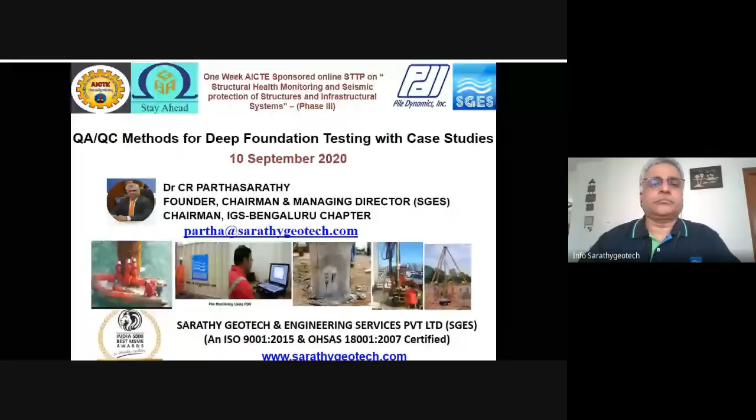We started in 2007 to provide services on an integrated approach for both offshore and onland projects. This is our vision and mission. We have accumulated a large repository of database across multiple geographies. It's not just the geotechnical data, but also the foundation performance, because we get involved in testing as well. This gives us a lot of confidence in deriving the ground model and appropriately designing the foundations.

We are present in India and in a few other countries as well, as you can see here: Indonesia, Saudi, UAE, and Vietnam. Our primary focus was oil and gas, but of late, for the last few years, we also have significant projects coming from real estate infrastructure, railway infrastructure, mining, renewable energy, and some small aspects from the dam sector.

More than 50% of our service is consumed outside the country, and thus the state government and the central government have conferred the export award consistently for the last few years. I'm sure even this year we will be honored with this prestigious award.

As far as the scope of service is concerned: offshore geotechnical and geophysical investigation, pile drivability analysis using wave equation program, fatigue during driving analysis, pile monitoring using pile driving analyzers. I'll be talking about this high strain dynamic test in this presentation. I will also give an introduction to CAPWAP analysis, leg penetration analysis, and punch-through assessment of jack-up rigs.

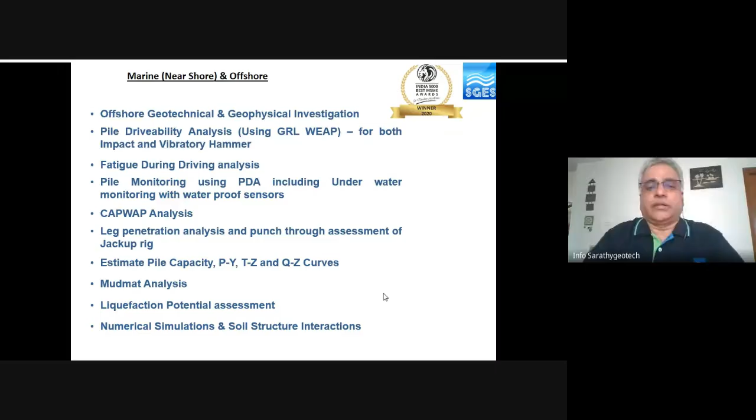This is for an exploration project in the oil and gas sector: the load transfer curves and the capacity estimation. MUDMAT is a shallow foundation problem, liquefaction potential assessment, and this will go into the engineering report as part of the offshore geotechnical investigation. We have a large suite of internationally acclaimed, recognized software, and the recent addition is Plaxis 3D to model three-dimensional soil structure interaction problems.

Onshore and offshore, we always advocate an integrated approach: site survey, performing a geophysical investigation, identifying the geohazards, and developing the scope of geotechnical investigations. We use all the data together to design the foundations, whether it is offshore construction or onshore construction.

Even onshore, we do geophysical investigations using MASW, seismic refraction, cross-hole and downhole tests, electrical resistivity, and GPR. We added all these in the last few months, along with geological investigations, when you have rocks, to evaluate the rock mass and geological mapping, plus geotechnical investigations with SPT analyzers.

I'm not going to talk about this in this presentation, but it's very important to measure the energy transfer to the rods while conducting the SPT, to also apply field corrections, normalizing to 60%, where we actually use a lot of correlations for design of shallow and deep foundations, bearing capacity, settlements, slope stability, and retaining structures.

Bored pile testing, PDA and PIT, I'll be talking extensively on this. Cross-hole sonic logging, shape and squid, I will talk about this in this presentation.

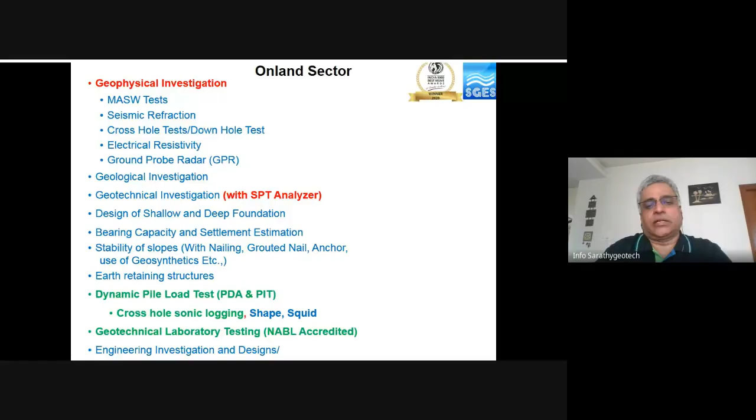Geotechnical laboratory - all the green color ones are accredited to ISO 17025 standards, that is, in the country, NABL accreditation. Engineering investigations and designs, pavement geotechnics, and forensic geotechnics if there is any failure case studies. Ground engineering and installation solutions.

We have been very successful in design and building deep excavation, vertical cuts as deep as about 18 meters as of now in Bangalore.

We have added this asset, the jack-up barge, to conduct marine geotechnical investigations. We have the capability up to about 12 meters water depth currently.

We are also adding this multi-purpose high-end geotechnical drilling rig, which can conduct an SPT test with an automatic hammer using this capstan, can perform a CPT test, wireline rotary drilling. You can do an in-situ vane test, collect samples in soft clays. If you have rocks, you can switch over to core barrels and collect rock core samples. This high-end drilling rig is being introduced from the US for the first time in India.

This particular product will be available by the end of October. One of the advantages we will derive is to cater for infrastructure projects of the time. For 50-meter boreholes, with our existing methods, whether it's a hydraulic rig or a calyx rig, it will take a few days to complete one borehole, but this rig can do 2 boreholes in 1 day. So that is the advantage. We want to utilize this for fast-track infrastructure projects. If there is any need, please get back to us, so we can block this resource for important projects.

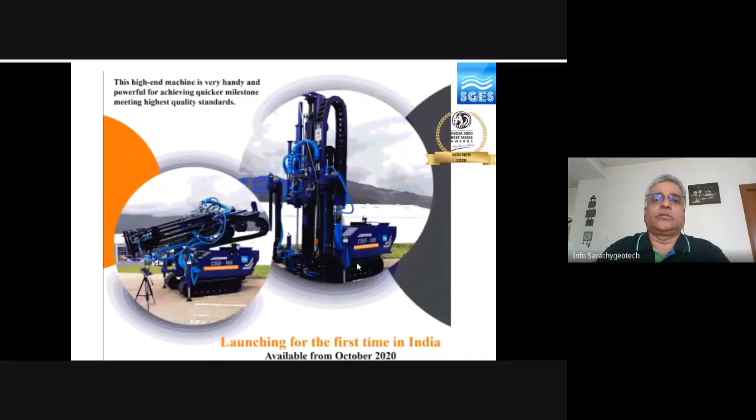Now, on deep foundation testing: static load test, axial compression, pull-out, lateral, conventional testing, low strain integrity test, cross-hole sonic logging, shape, squid, high strain dynamic test will be the topic of today's presentation. I will start this on the next slide. So after this brief introduction about our services, I will get into the topic of today's presentation.

First I will start with the QA/QC methods before the construction of the pile, that is before pouring the concrete, using the shaft quantitative identification device, which is the SQUID, and shaft area profile evaluator, which is the SHAPE. Then I will get into the low strain integrity test, discuss the other methods of integrity evaluation using cross-hole sonic logging test, and lastly give an introduction to the high strain dynamic load test, which will be a replacement to the conventional static load test by Kentledge methods.

So SQUID is a shaft quantitative identification device. I acknowledge Dr. Rozbeh Moghaddam, some of this information I have collected from him. He's also an expert in evaluating this, both the software and the hardware and the philosophies that have been developed into this technology.

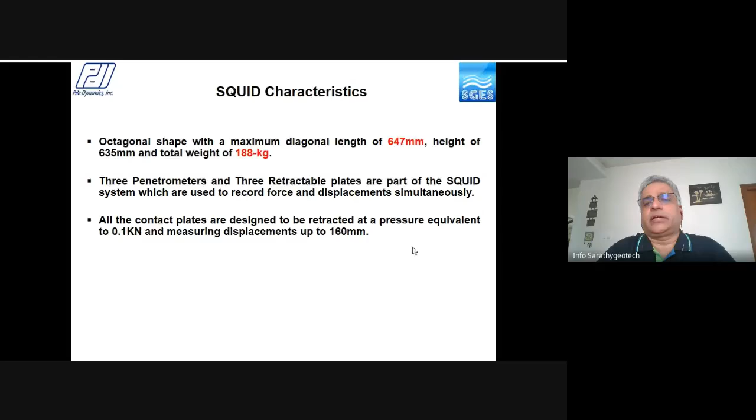The SQUID characteristics: it's an octagonal shape equipment which has a diagonal length of about 647 millimeters and a height of about 635 millimeters, total weighing around 188 kilograms. There are 3 penetrometers at the base, I will show that in the next slide, and 3 retractable plates which are part of the SQUID system, used to record force and displacement simultaneously. All the contact plates are designed to retract at a very low pressure, measuring displacement up to 160 millimeters.

Of course, the pressure divided by the area of the penetrometers will give you the force. The penetrometers are designed to be used with conical or flat tips, with an average cross-sectional area of 10 centimeter square. This is similar to the CPT test that we normally perform as part of geotechnical investigation. The resistance to penetration is measured by strain gauges arranged in a Wheatstone bridge, with the capability of recording up to about 100 MPa of pressure.

It's very important to know the dimensions of this Kelly bar so that your appropriate adapter tools are compatible with the piling machine. Otherwise, if the sizes are different, you have an embarrassment on the site and will not be able to perform the test.

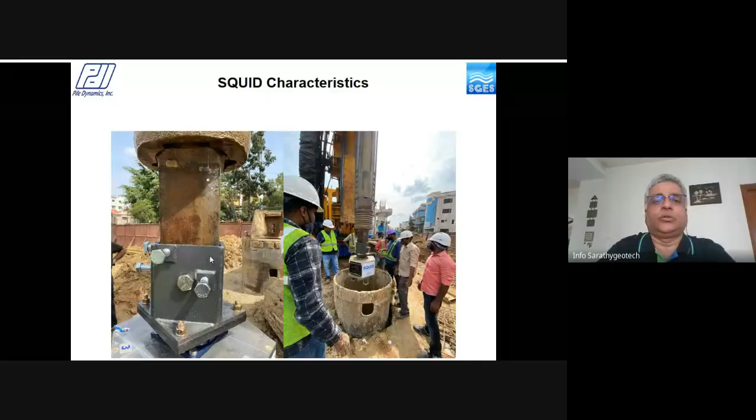Once you connect this to the Kelly bar and lower it into the borehole, you release the Kelly bar where there is a force on the top. Then these penetrometers start penetrating into the debris or contamination, as you can see here at the bottom of the borehole.

Why is this important? Particularly for rock socketed piles, which derive significant capacity from the base, we all want that borehole to be absolutely clean. Then when you pour concrete and do a load test, you probably get most of the capacity from the base.

But many times we see the problem that there is significant thickness of contamination at the bottom of the boreholes because of improper cleaning. You pour the concrete, and it doesn't displace the debris at the bottom. Finally, when you conduct the load test, there will be a settlement experienced by the pile.

To avoid this, we can quantitatively evaluate the thickness of the debris. If it is more than a certain prescribed limit—particularly in the US there are guidelines that the bottom contamination should not be more than half an inch—and if it's measured to be more than that, some vacuuming or other cleaning procedures are adopted before pouring the concrete.

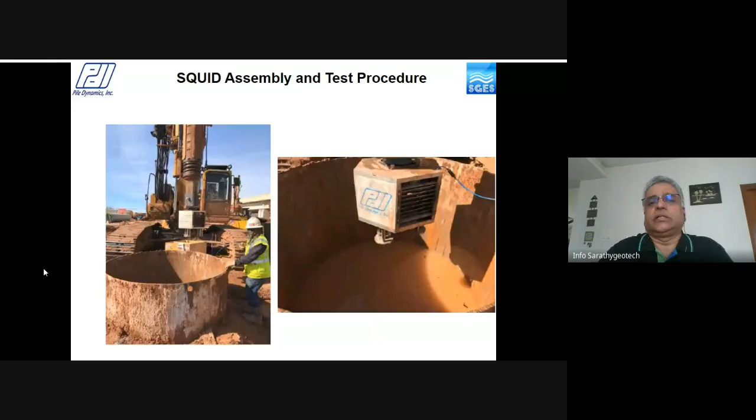If it is less than about 900 millimeters, you can do about 5 trials at the same location, so the average of all 5 trials will be your debris thickness. If you have a large diameter base, more than 1200 millimeters, you have to run these 5 trials in different quadrants—one at the center, then north, south, east, and west—and take the average of those debris thicknesses from all the trials, giving the quantitatively evaluated thickness of the debris.

When you lower down to the bottom of the borehole, you can always assign a threshold value, the probe threshold and the debris threshold. As we can see here, there is about 20 pounds to 150 pounds. In SI units, this is around 0.09 kilonewton to about 0.7 kilonewton.

The philosophy is that debris is assumed to be a cohesive material with a consistency varying between around 12 kilopascal to about 100 kilopascal. If the material is less than about 12 kilopascal, it has a very soft consistency and gets displaced during pouring of concrete. But if the debris material is more than about 100 kilopascal, it is treated as a natural material.

So this is more of a property of the debris material. I think there is flexibility to alter this if a large database is available, and experience indicates there could be some other different values.

At this point of time, with limited experience, we'll stick to what the manufacturer suggests. We can apply this threshold.

Then you lower it down, it touches. As you still further lower down, you could see the displacement from the 3 probes - the green, blue, and red. You could see the force after the displacement from each of those sensors - the displacement from the green probe, the blue probe, and the red probe, and then there will be a force measurement.

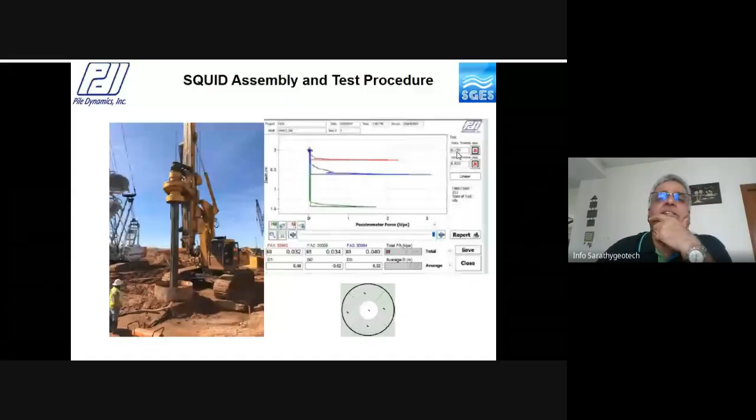So then you can unload it and remove it. The force will come back, and then the displacements also will come back to zero. You retract further, and the displacement comes back to zero, so directly you can see the debris thickness here. As I said, the threshold values of force between the lower limit and upper limit represent a very soft to stiff consistency.

That will be your debris thickness. So the philosophy I explained is considered for cohesive material for a circular foundation. The ultimate capacity is given by this - I'm not going into much detail about it.

If you consider the shear strength between 12 to 95 or 100 kilopascal, your threshold value for a 10 centimeter square diameter probe will be around 0.09 to 0.71 kilonewtons. This is the threshold that's going to be input into the equipment. Between these thresholds will be your thickness of debris.

You can see the thickness of the debris for a force of 150 pounds or 0.7 kilonewtons, and this is for 20 pounds or 0.09 kilonewtons. The difference will be the actual thickness of debris computed by this equipment.

Now, we all want to see that during the test there's a displacement and a nice force - we saw that in the previous slide. After that, when you unload it, this force has to come back to zero, and then the displacement also has to come back to zero.

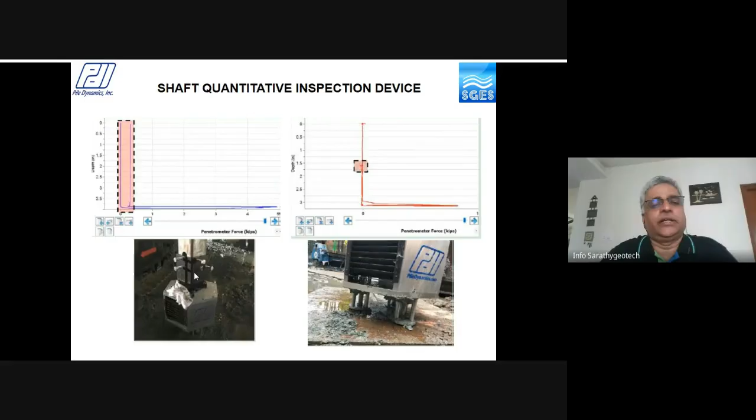This bending is because these bolts, which should be tightened enough to hold the template and the Kelly bar in position, are sometimes not tightened properly. Therefore, during lowering and testing, there is always some bending. These are very small aspects, but very important ones that need to be considered when performing the test.

When you do the test, the contamination established gives a debris thickness of 5 inches in one case study, 0.7 inch, and 4.5 inch in others. As I said, if the average is more than half an inch, some guidelines do not permit it - although in India we don't have any guidelines as such at this point of time. Probably this is US practice.

So you do a vacuuming once you have evaluated a large thickness of debris. After vacuuming, you do the test again, and if you see the average is less than half an inch, then you can allow them to pour the concrete.

So this is how you see, in an enlarged screenshot, the force displacement curve. These are the threshold values - the displacement for a lower threshold and the upper threshold. The difference will be the thickness of the debris in those 3 penetrometer locations.

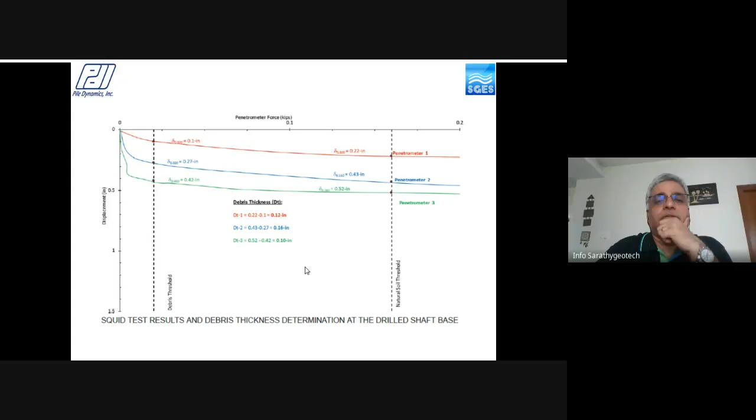It's a very, very useful tool for evaluating quantitatively the thickness of the contaminations. And you could also read this directly on the tablet. The average of these 3 things should be ensured to be minimum than the prescribed limits.

I repeat again, this connection should be compatible, so you can have fabrications ready with 2-3 different types, as many as the number of types of Kelly bars depending on the piling rig available. We commissioned this in one of the metro projects very recently, around 10 days back in Bangalore.

The Kelly bar going into the squid template, tightening the bolts with a cotter pin, and then these will be tightened to hold this in position. Once it is done, you lower this squid into the boreholes. This was a 1200 millimeter diameter pile, around 17 meters deep.

And if you have any polymer bentonite, no issues on this. It can work very well.

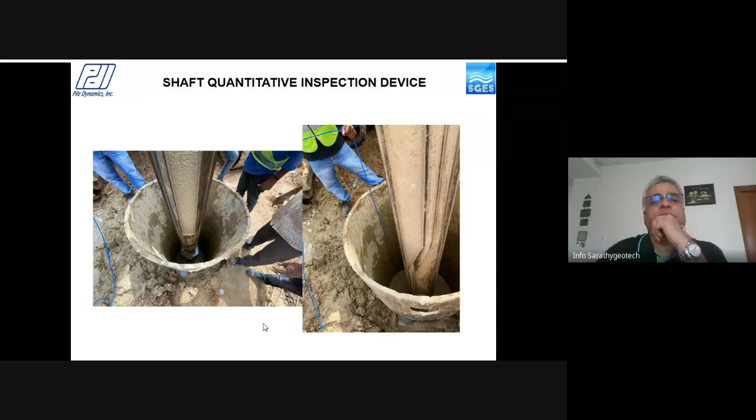This is at the center of the borehole. Then we pushed it to the left, right, and all the quadrants.

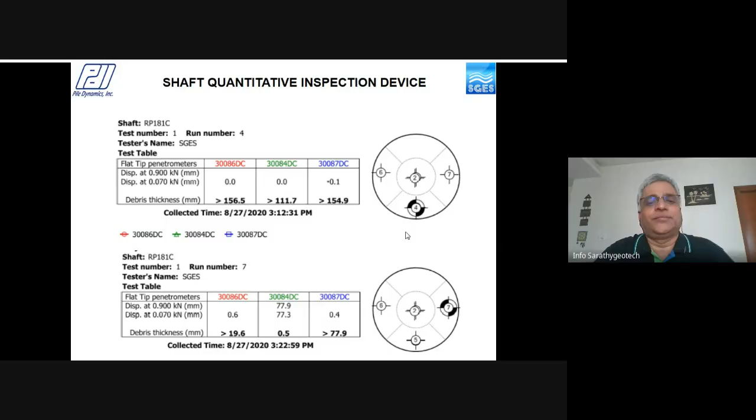So then we asked them to clean, and they did cleaning, but apparently this was just a trial pilot project. We did not do the test after the cleaning because of some site constraints. And you see that the debris is already clogging at the top of the penetrometer plates.

So the first trials, we removed this where you had about more than 100 millimeters of debris. This itself indicates that the bottom of the borehole is contaminated.

All right, so we'll move on to the next one, the shaft area profile evaluator - we call it SHAPE. The diameter of this equipment is 460 millimeters and a height of about 560 millimeters. It's weighing about 32 kilograms.

So you see these are the ultrasonic sensors, connected circularly, which radiate these waves outside. There are about 8 numbers, and also two facing each other at a known distance for calibrating the wave speed as this equipment penetrates along the length of the shaft.

So what happens here - when you apply a voltage to the ultrasonic sensor, the piezoelectric element changes its geometry. This induces pressure waves which radiate through these ultrasonic sensors. When it reaches the wall of the borehole, it comes back and the time is computed. Knowing the wave speed and the time, the distance can always be computed.

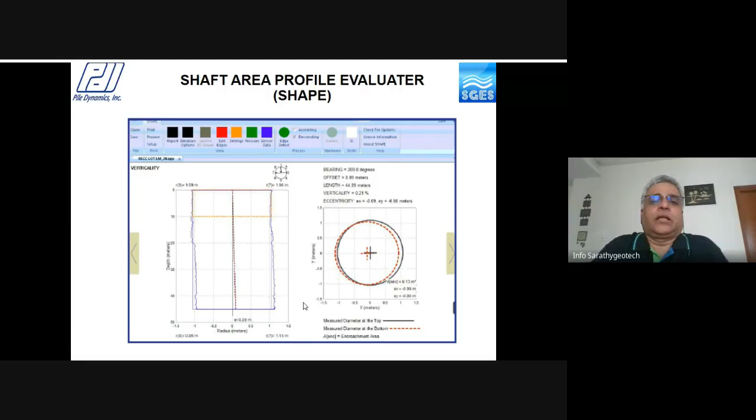So as you lower down the equipment into the bottom of the borehole, along the length of the shaft, you can get the radius. You can also get the volume of the pile bore excavation, and also the verticality of the borehole, particularly useful for large diameter drilled shafts.

So along all the length of those ultrasonic pulses and directions, because 8 numbers are attached to the equipment, you can get the geometry of the pile boreholes along the length.

So both SQUID and SHAPE have been potential quality control tools. It's very popular in the US, and this is a new recent addition. I think in India, we are the first ones to introduce it. SQUID is already commissioned, and the SHAPE is going to be commissioned very soon.

All right, with this brief introduction to the SQUID and the SHAPE, let me go into the other quality control methods.

So I want to give a perspective before I start the low strain and the high strain dynamic load test. As we all know, the static load test using Kentledge is conducted, and we apply a factor of safety of say 2 to derive your allowable loads.

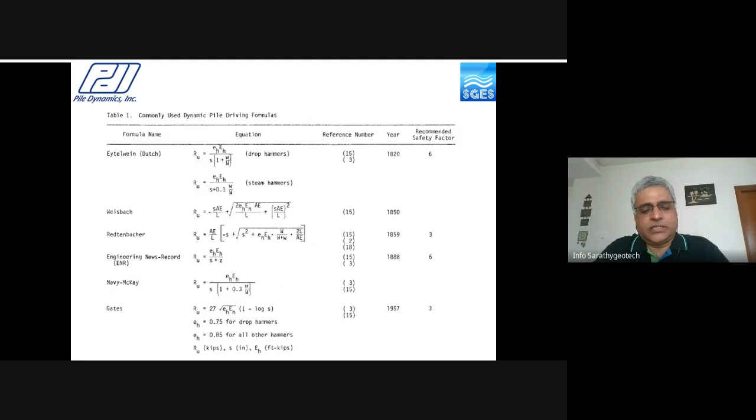So why this perspective? The driven piles are not new for civil engineers. They exist for several centuries now. In the early days, the simplest measurement available was only set per blow during driving. So there were numerous empirical equations developed, equating the energy transferred to the work done in estimating the ultimate capacity of the pile. There are many of these energy equations - the Dutch formula, the Weisbach formula, Engineering News Record, Gates formula, and so on and so forth.

But I draw your attention here on the recommended factor of safety from these formulas. It is 6, 3, 6, 3. Hundreds of formulas are available, I'm sure all of you are familiar. But what is important here is the recommended factor of safety needs to be very high because of the uncertainties I'll explain to you in a minute.

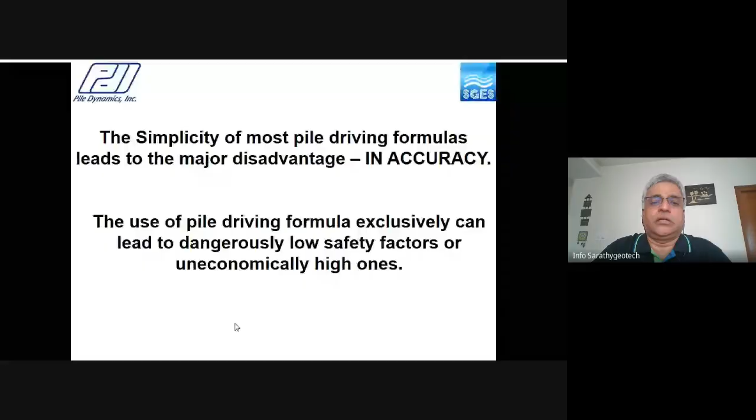The simplicity of most pile driving formulas leads to the major disadvantage of inaccuracy. Use of these dynamic formulas in estimating the ultimate capacity exclusively can lead to dangerously low factors of safety or uneconomically high ones. And the variety and number are matched only by their shortcomings.

Now, recently, Pile Dynamics in 2015 released a newsletter. They mentioned that pile design based on dynamic formulas was already discouraged in the 1940s due to inaccuracies, referring to that ASCE conference.

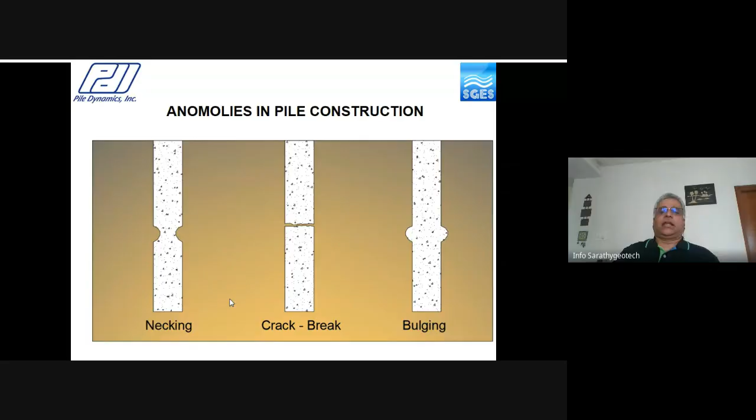So during pile construction, there could be several anomalies, as you could see - necking, cracking, bulging - and this could happen anywhere along the length of the pile. Even driven precast piles during driving could experience stresses, maybe higher compressive stresses or tensile stresses beyond the limit, and experience cracks in the drilled shafts or the bored piles.

So this is one classical example. In one of the projects, for a lift pit, they had to excavate a little deeper for putting the cap. They started excavating slightly deeper than the other elevations, then they could see one stirrup here. They excavated a little deeper and could see the second stirrup. Finally, they exhumed the pile - the bottom 3 meters did not have concrete. And this pile should withstand the loads from a ground plus 22-story building.

There are many anomalies in pile construction. You could see necking, you could see bleeding of concrete, you could see the breaking of driven piles at the toe, at any elevation. Even steel piles driven to rock can get damaged.

So once these deep foundations are installed below the ground, there's no way you will be able to identify these anomalies by just performing a static load test. So in order to ensure the safety of foundations, it is imperative that these anomalies should be identified and detected.

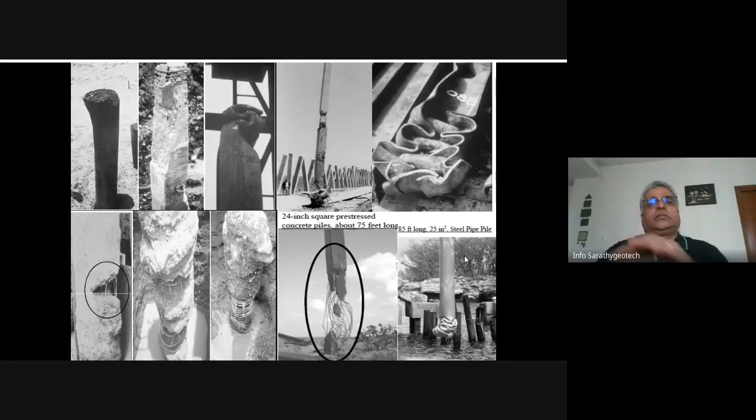So thus today the profession has a whole arsenal of modern technology and tools available to assist in providing efficient and economical deep foundation solutions. One of the quality control methods, the SQUID and the SHAPE, is prior to pouring the concrete. And what I'm going to talk about now is after placing the concrete, or during construction if it's a driven pile.

As I explained, the limitation of the earliest measurement was only set per blow. They did not have any other means to measure what is the energy transferred to the pile. And so the dynamic formula was discouraged.

With that limitation, the research began in the early 60s under the guidance of Professor Goble, which resulted in developing the case method, or the pile driving analyzer, which gives pile capacity from pile top measurements. I'll also discuss the wave equation analysis program, which is used for pre-installation analysis for selecting hammers, though I won't cover that today due to time constraints. CAPWAP, the case pile wave analysis program, is a post-test analysis, and I'll give an introduction to it during this presentation.

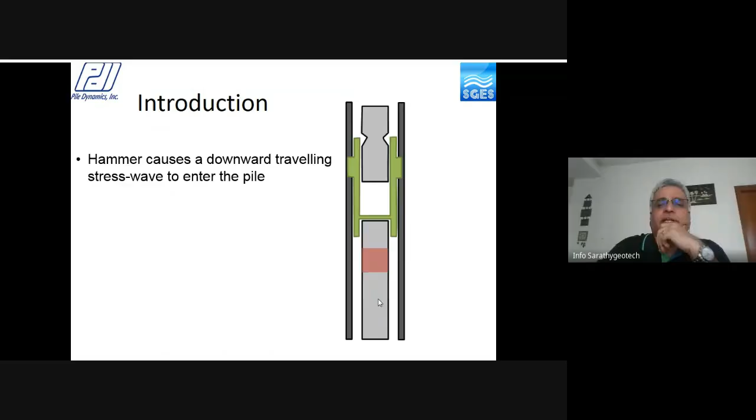Now, when there's an impact on the top of the pile, a stress wave propagates down and enters the pile. Whenever there is a soil resistance, section change, or impedance change, these downward traveling stress waves will have an early reflection. If neither of these is present, the stress wave propagates all along the length of the pile up to the bottom. At the bottom of the pile, when there's a medium difference, a reflection occurs.

So this stress in the pile can be represented by one-dimensional wave theory, and this stress wave can be analyzed by measuring the pile top force and velocity. So how do we measure this force and velocity? This is done by instrumenting the top of the pile with a strain gauge and an accelerometer.

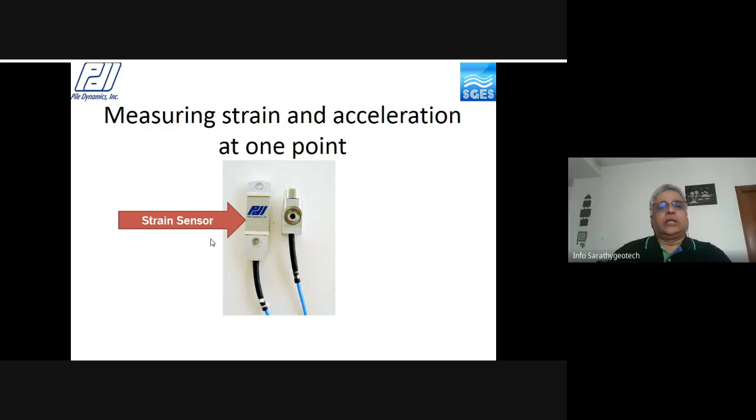The strain gauge measures the strain in the member. We know the modulus of the material, which is stress divided by strain, so if you measure the strain, you know the stress. If you know the cross-sectional area, you can get the force using the strain gauge. The accelerometer measures the motion of the pile, and integrating that gives you the velocity.

This is a relation: the force and velocity are proportional, with a constant called impedance, which is defined as the modulus times cross-sectional area divided by the wave speed. I'm not going to derive this in this presentation, but we can take it that force and velocity are proportional, with the constant of proportionality being the impedance.

Now, when you mount the sensors on top of the pile and an impact from the hammer induces a stress wave, the stress wave travels down into the pile along the length of the pile by a distance L. This is the initial rise of the stress wave, and as it reaches the gauge location, this is your initial peak. Now, when it reaches the bottom of the pile, there's a toe response.

But this toe response is not seen by the sensors unless the stress wave travels back another distance L and reaches the sensor location. Essentially, there is a 2L path, one downward distance and then the return. We know the wave speed, C, so twice the length divided by the wave speed gives us the time point at which the toe response can be visualized.

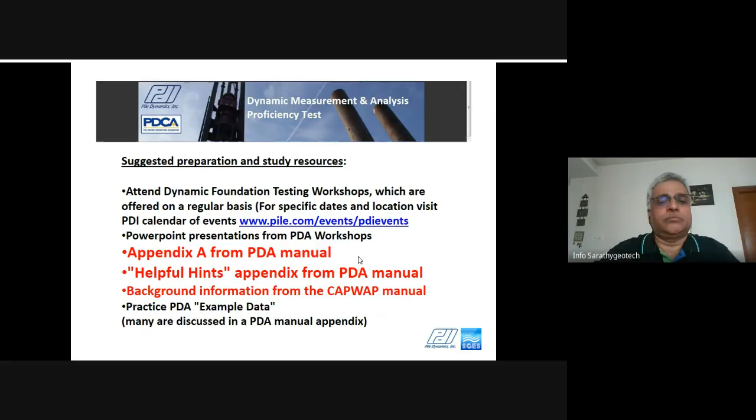If the score is more than 75%, that's an advanced level. Many companies around the world prescribe that PDA testers should have achieved minimum advanced level or higher. That gives a lot of confidence to make an on-spot decision on test results. I'm very proud to say more than a dozen of our engineers are certified advanced level or higher from India on this proficiency test.

You can see this information on pdaproficiencytest.com. Now let us get back to the test aspects. Tests on bored piles, as we all know, can be a low strain pile integrity test or a high strain dynamic load test. We'll discuss both of them now.

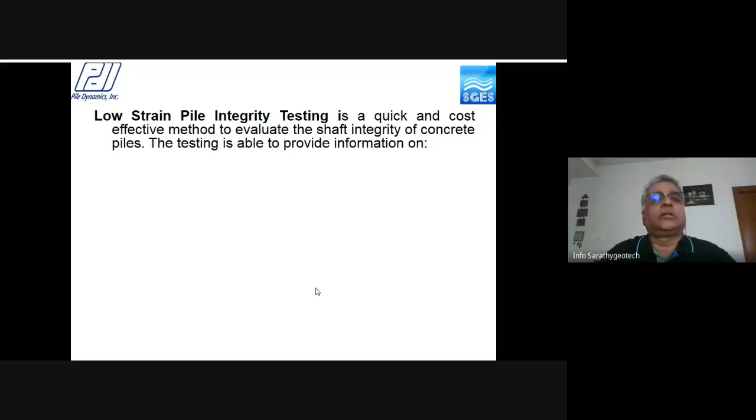This low strain integrity test is codified as per ASTM D5882. We also have an IS code 14893:2001. The low strain integrity test is a quick, cost-effective method to evaluate the shaft integrity of concrete piles. The testing provides information on pile continuity, the location of defect, and the degree of defect. This will not give the bearing capacity of the pile.

The test method is performed with a handheld hammer and a sensitive accelerometer in the pile integrity tester.

Why do we do the test? We do it to find defects, assure quality, and reduce risk. There are many anomalies during pile installation. When these piles are embedded into the ground, there's no way to evaluate any of those anomalies unless tested.

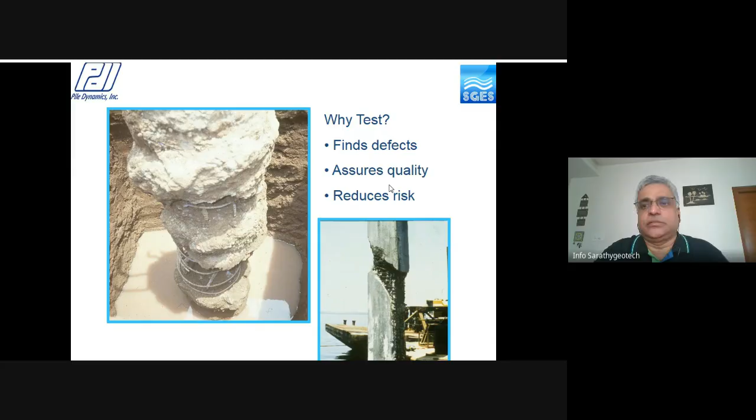Many times we don't test, and we've seen failures in deep foundations also. So which pile do we test, and which pile can be tested? Any of these piles could have a defect, and all piles can be tested. This low strain integrity test being very simple, the current practice is to test 100% of the piles in a project. Consistently, if there are anomalies in installation, it will be detected with very simple means, so the contractor can take precautions for subsequent installations and mitigate further problems.

As I described, the hammer impact creates a compression wave, a stress wave. Even for the pile integrity test, we mount a small accelerometer at the top of the pile and give an impact from a handheld hammer. This impact induces a downward traveling wave. At the base, when you reach the bottom of the pile, there is a response from the soil which creates an upward traveling wave. These are all very small pulses from the low strain test because the impact is very small.

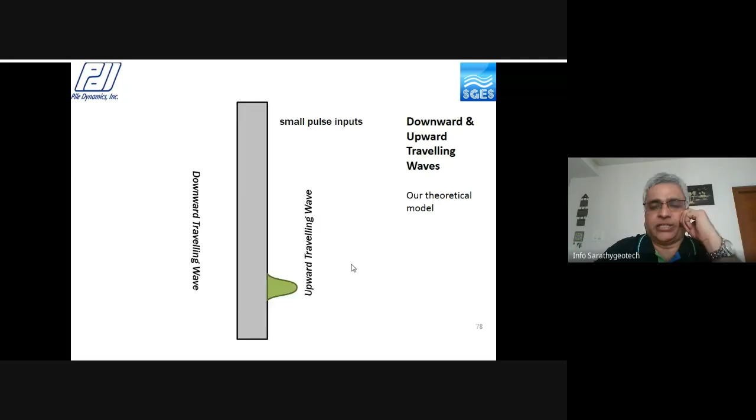Let us examine this, it's due to the end conditions. The pile bottom can have two extreme end conditions: one is a free end, the other is a fixed end. The downward traveling compression wave is a stress wave that will be in compression. When it encounters the bottom of the pile, if it is a free end, for example soft clay at the bottom,

then the reflected wave will be in tension, pulling the particles down, meaning the pile is moving. So when you start driving, the pile drives easily, moving even with very small energy. So what happens to the velocity? Velocity will be positive because it is moving down. That's why at the toe, the response velocity is positive, indicating a free end. The force can be zero or maybe negative here. That is the extreme condition.

The other scenario is a fixed end, where the pile may be embedded into rock, or it's a rock socketed pile.

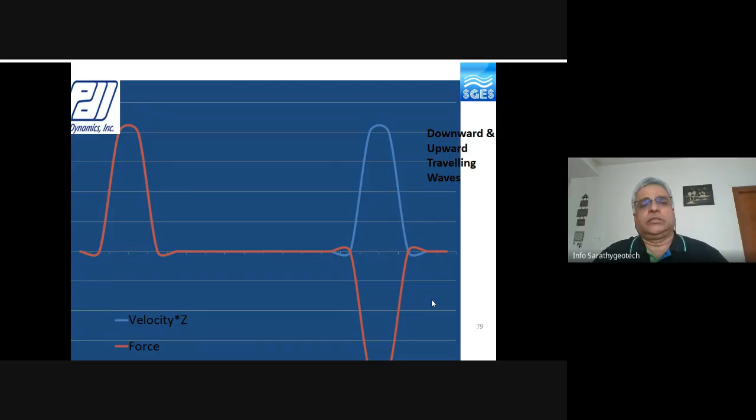So the simple interpretation here: the response of the pile toe at a time 2L by C after the first peak will be a positive velocity if it is a free end, or a negative velocity if it is a fixed end. These are the two extremities, but for our practical considerations, the pile will be anywhere in between these two end conditions.

Now, here is how the test is performed. You mount accelerometers on top of a pile with a small handheld hammer, give an impact connected to the pile integrity tester, and you see the velocity time history because you are getting the data from the accelerometers. You can also have an instrumented hammer with you to get a force measurement.

This is the top of the pile. 2L by C time thereafter, you see the response from the pile toe. The velocity is positive, it indicates your free end. When you see an anomaly, a necking like this, anywhere along the length of the shaft, before the stress waves reach the bottom of the pile, since it encounters the anomaly, there will be an early reflection happening here.

So if you see a positive reflection, as you could see here, it indicates a defect. If you see a negative reflection, that is those reflections going below the x-axis, you see a bulge.

It is idealized here. The top of the pile, 2L by C time thereafter, you see the response from the toe. The velocity is positive, indicates it's a free end.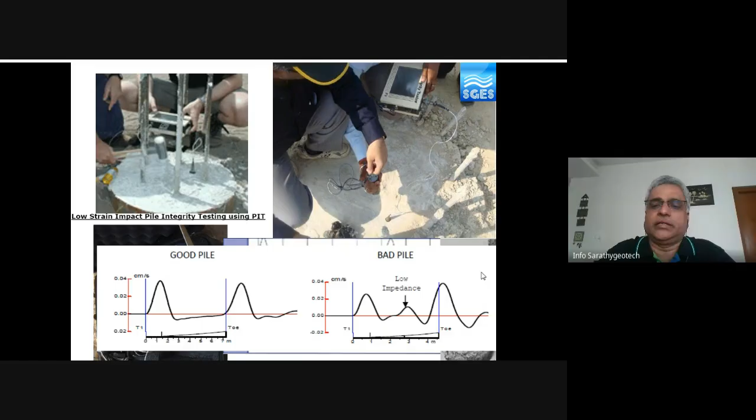But if you see any early response, then it indicates a low impedance, or for the bored piles, you could treat this as a bulge or necking.

So it's very important for this test that the pile top has to be prepared. All the loose concrete has to be removed. The pile top has to be leveled, nicely grinded, so that you mount the accelerometers and then you test. So what you see on the screen is a good pile top preparation.

Some of the piles have been capped already before even testing, and finally they receive insistence from the consultant that they want to do the test. Then you have to go and prepare the pile top. So you take this reinforcement outside, bend it outside, otherwise there will be some noise from this reinforcement.

The pile top has to be ground nicely, and then you mount your accelerometers and give the impact from the handheld hammer. Take a number of blows, multiple blows. If the blow to blow is consistent, then probably you can stop the test. If you see that varied response for each of those blows, then you can acquire as many blows as possible.

So generally, if it is a 1000 millimeter diameter pile, you mount the accelerometers at 4 locations and give around 5 to 6 blows at each of those locations, so that this equipment will average out and give you the velocity time histories for this average.

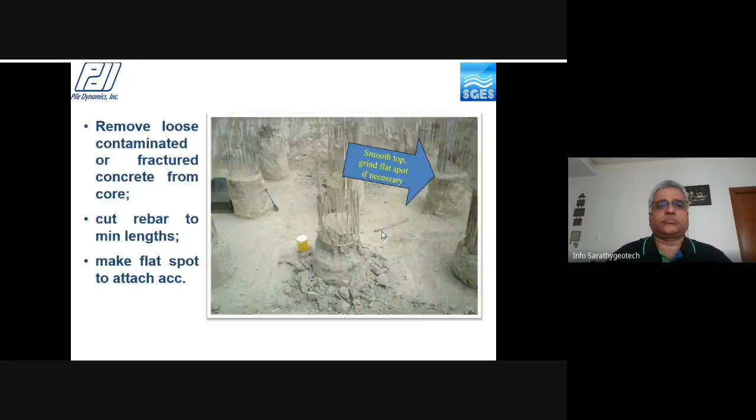And further it will tempt the testing agency to give some reports which will not make any sense. Thus the pile top preparation is the key to get good data, which is also the key to do a best interpretation. Shortcuts always cause questionable data, and as I said, that tempts the testers to give some reports.

So grinding on top of the surface to make it flat is very important. Although the pile top has been nicely prepared and all the loose concrete has been removed, wherever you're mounting the sensors, you have to grind it, make it level, brush it, and then you mount the sensors with the grease adhesive so that it fits nicely onto the top of the pile.

This is unacceptable. If you see a contaminated concrete, it has to be removed. Either it's contaminated or fractured concrete, and you should always test on sound concrete.

This again is not acceptable since you don't grind the surface and make it flat. The accelerometers will not be rightly in contact with the pile, and thus you may not even get any signatures there.

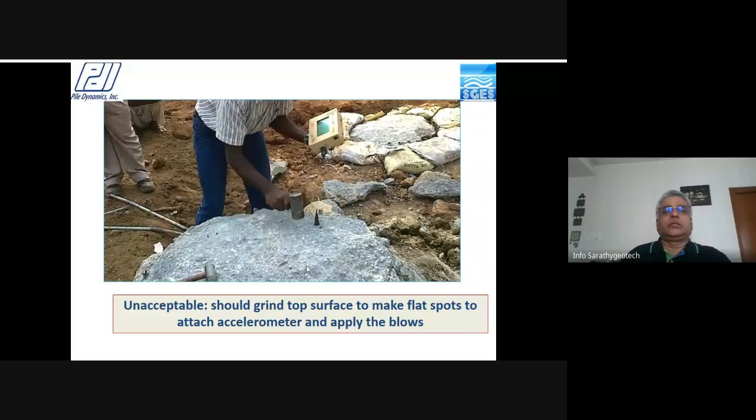These are less than ideal conditions, but the preparation is still acceptable since where the test is performed, the pile has been prepared. Perhaps they would have prepared all around the piles and taken multiple blows. This is again a less than ideal condition.

I think only at the locations where they're mounting the sensors has it been grinded. And you see the reinforcement has been bent outside. This is the way it has to be tested, or cut it to a minimum. Otherwise, you will see some random noise from this reinforcement because it's a very low strain test.

So the test can be conducted with various models of the pile integrity tester. You have the PIT-V model, which is wired. This is an accelerometer which has a cable connection, which can also be wireless. This is a wireless accelerometer, connected with just a small palm top type model. Nowadays you have other latest models as well. But regardless of the development of these hardwares, the primary interpretation of the data has remained unchanged, and thus we can just use the original interpretation.

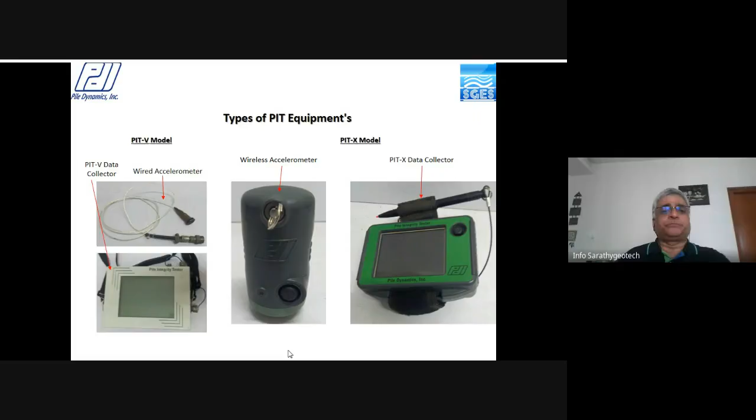A very important aspect of this pile integrity test is to decide the size and type of the hammer to be used. So what size of the hammer fits in? One size will not fit all the piles, because piles have been installed from as short as around 2 meters to as long as around 100 meters. So when doing an integrity test for varied lengths of piles, one size doesn't suit. You may have to calibrate different sizes of the hammer. So what is the effect of these different sizes of hammers?

If you see a big hammer, you could see a wide pulse. With a small hammer, a 1 Newton hammer, and a 6 Newton hammer, you see the pulse width. The pulse width is so large that it will mask if there is any anomaly at the top of the shaft.

When you see a wide pulse, the reflection from the defect - if there is any positive reflection, it is an anomaly or a defect in the shaft. You see a positive reflection very close to the top of the pile. So for a wide pulse, the reflection from the defect overlaps the initial pulse, making it even wider. This means the wide pulse will mask any defect at the top of the pile. Thus, it is important to calibrate with different hammers to ensure that even those anomalies get detected.

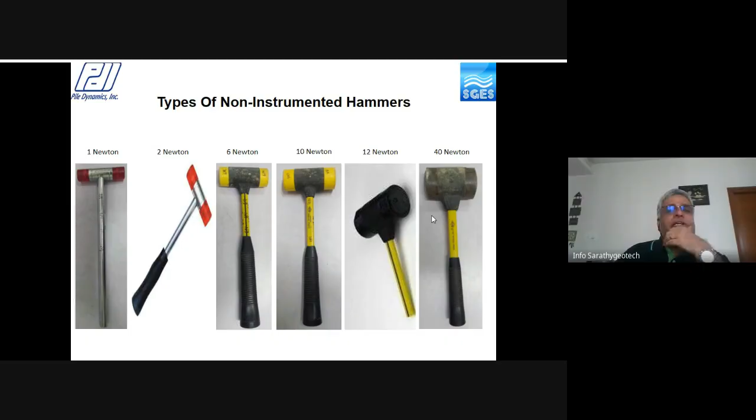So use various sizes of the hammer. If the data is consistent, then you calibrate that as the right hammer for that pile size and length, and then use it for subsequent testing.

If you use a very big hammer, you see a wide pulse with no clear toe reflection. But if you use a small hammer, you could see some sharp peaks at the top of the pile and also the toe reflection. If you don't see any toe reflection, then this data cannot be analyzed. So it is very important that the hammer shall be calibrated.

As you can see here, this is a 6 Newton hammer. Around 5.1 meters is the length of the pile. With a big hammer, you see the pulse width is very large here. The small hammer shows a sharper peak with a lesser pulse width, and also the pile toe is very clear.

On the right side is the same 6 Newton hammer. The impulse width is more than 2 meters, and the toe is not evident. If you don't have any evidence of the toe, this data cannot be analyzed. So if you use a small size hammer, you see the pulse width getting shorter with a sharp peak, and the toe is evident.

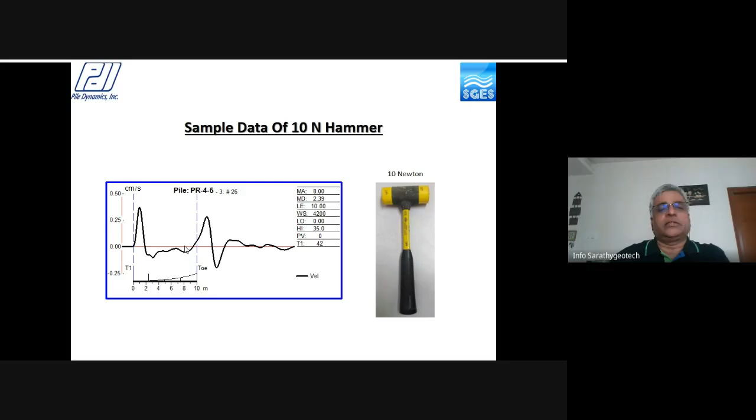You see the velocity time history. You could see a positive reflection happening ahead of the toe. If you detect any kind of anomaly like this, or a pile defect, the practice is to core the pile. Apparently in our country we don't do that, but in the US they ask the contractor to core. If you core the concrete and remove the concrete cores, you see the contamination of the concrete, which is a defect very well identified by this pile integrity test.

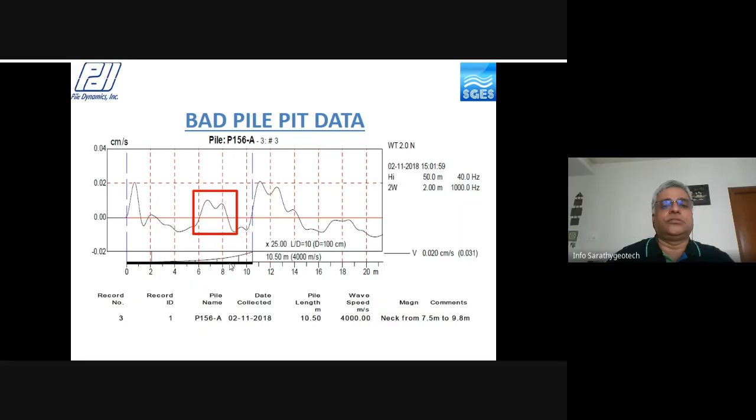You can also run a profile analysis, which can very well evaluate that there are cross-sectional changes indicating there is a bulge followed by a neck.

This is another data. You see a bulge, followed by the necking here. So if this interpreted cross section is less than, say, 80%, probably you may have to reconsider accepting this pile and conduct a load test. If it is more than 80-85% of the cross section, I think the benefit should go to the contractor, where the drill shaft can never be idealized to be a cylindrical piece because of the uncertainty in soil conditions. There will always be a variation in the pile geometry.

This is an idealized pile. Perhaps now all of you can interpret, is it to be a bad pile or a good pile? Obviously on the x-axis you don't see any positive response, clear toe reflection happening, and this will be due to your soil effects, and thus it can be treated as a good pile. The integrity is fine, no issues on the integrity.

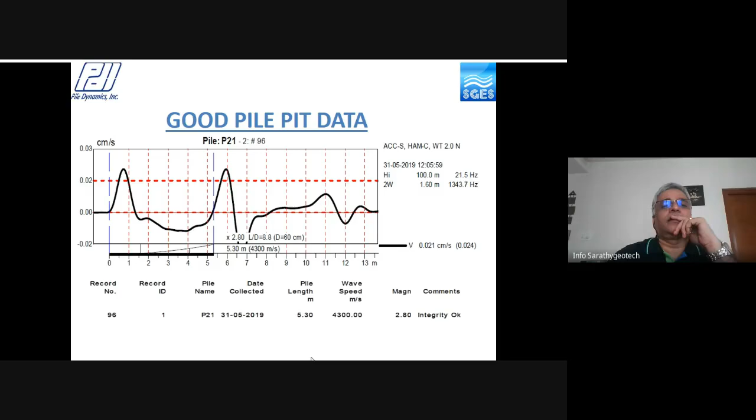And you can run a profile analysis to evaluate the shape of the pile geometry. I think there is no problem in this, and the concrete volume it has consumed is around 10%. If you know this information, it's very useful to interpret the data. If you know the pile volumes, then probably it will be very helpful in deriving this profile analysis, preferably along the length of the pile. It is very seldom that contractors will record those concrete volumes along the length of the pile.

But you can have an overall consumption of the concrete, and if you see an excess consumption of concrete, it can also lead to a bulge, which shows as an increase in the cross section of the pile. If there is a reduction in consumption, then you can evaluate that the pile could have some defect.

This is another idealized pile. You see that there could be some extra consumption of the concrete at this point of time, a clear toe reflection, and a very beautiful shaft. No issues on this.

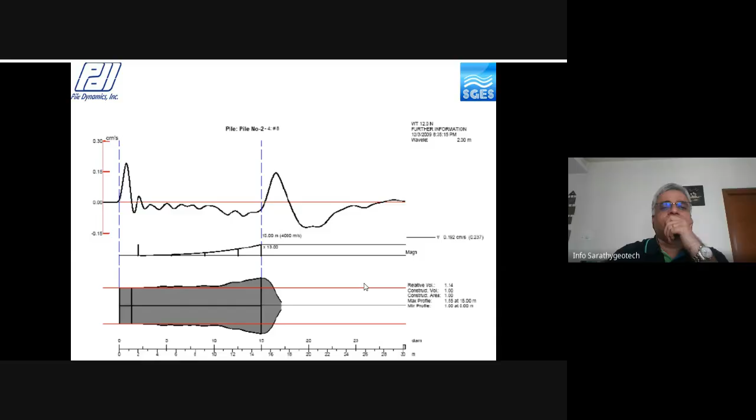So what do you make of this data here? Velocity time history, the top of the pile. There could be some small bulge here, clear toe reflection. This can be treated as a good pile.

Now the data people collect will not be as idealized as we have discussed. There will be a lot of issues with the data because of site conditions. Sometimes the length of the pile, the soil resistance, masks the penetration of the compression wave. We may have to condition the data for further interpretation, but I'm not going to talk about that conditioning and interpretation because of paucity of time. That will be covered as part of the training to get hands-on experience on data interpretation.

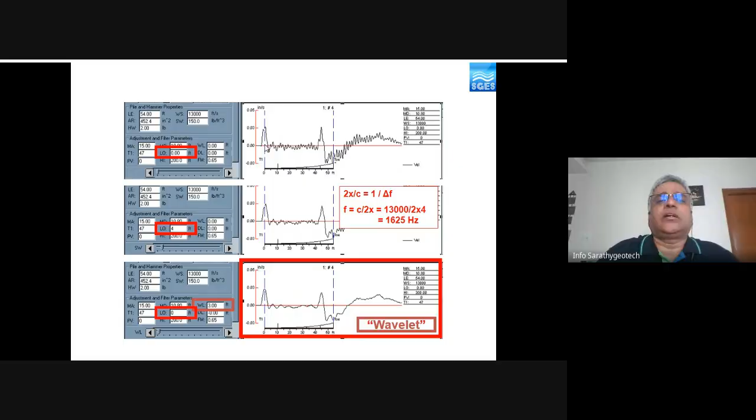So I can just demonstrate one classical example of this data. You could see here, this is the top of the pile, idealized, then you see the toe response. The pile length furnished by the contractor was around 55 feet, but the pile integrity test is evaluating the pile length to be around 42 feet.

Now, many times we also have this experience - the limitations of pile integrity test in estimating the length of the pile. The wave speed itself for concrete is not constant. It varies as the strength varies, it varies as the age of the concrete varies. So plus or minus 5% variation in the wave speed is not uncommon, and thus the pile length interpreted by the pile integrity test in the order of about 5 plus or minus 5%, around 10%, is not uncommon as well. So now you see here 55 feet to around 42 feet.

I think probably this is a short pile. So this is very important, to have as accurate information as possible.

Now this ringing noise can be filtered out using a low pass filter or wavelets. There's one option available, so the ringing tone can be eliminated to give a smooth curve by applying filters. I'm not discussing these things, but I want to highlight that this is a shorter pile than what the data was furnished by the contractor. So very clearly, if you have a toe response, it could be detected. The length of the pile can also be detected in addition to the anomaly.

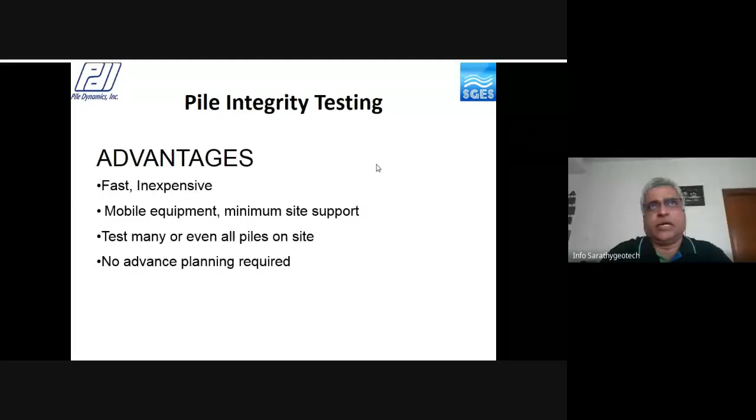You can test many piles - 100% of the piles being tested. So in 8 hours of work, if the pile tops are prepared nicely, you could test around 30 to 35 piles, or maybe 40 piles per shift. There's no advanced planning required except preparing the top of the pile. The minimum pile surface preparation, as you could see, is just removing the concrete, grinding, making it level.

And this integrity test finds major defects. The limitation is it cannot locate a defect after it has already located the first major defect. And also the limit is the length to diameter ratio, which generally as a thumb rule is L by D of about 30. But then if you have a very soft layer of greater thickness, maybe some 20-30 meters on the top, then this L by D usually can go up to maybe 150 to 160.

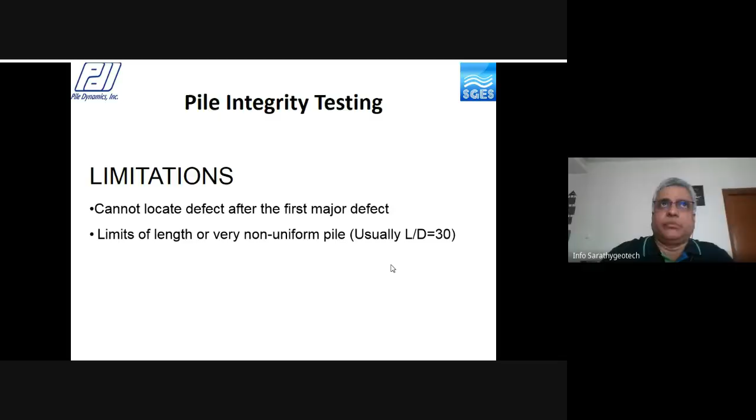We have successfully tested as well. But if you have strong soils from the top of the pile, the resistance will mask the penetration or impede the penetration of these stress waves, and thus you have to use a slightly bigger hammer. The thumb rule says L by D of about 30 - this is just a guideline, not a strict rule.

The cracks or joints block the waves. Suppose it is a jointed precast pile - if you are conducting an integrity test, only the first section, if it is segmental precast, about 8 to 14 meters is common. The top 8 to 14 meters can be evaluated accurately even if there is a crack or joint. For the subsequent sections, it will block the downward traveling waves, and thus you will not be able to evaluate the integrity beyond the cracks or joints.

Now, if you see a clear positive reflection, this is a defect. What you could see thereafter will be the secondary waves, secondary reflections from these defects. That's why if you locate a major defect, you cannot locate any further defect, and what you could see here could be a secondary reflection from this major defect itself.

Shafts with multiple or highly variable impedance changes produce complex records which are very difficult or impossible to analyze after the first or second major reflection. Therefore, we have to understand the limitations of the test and make use of the best advantages of this test. This is a very simple quality control test which could identify major defects consistently. If there is any installation issues, then that could always be corrected, and the contractor can change his installation procedures to eliminate those kind of defects during the construction.

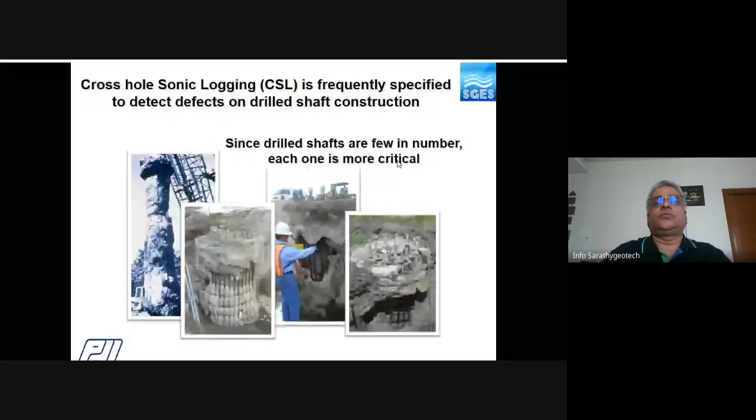The other method is this cross-hole sonic logging test. This cross-hole sonic logging comprises embedding the access tubes, normally a steel or a PVC pipe. It is connected to the reinforcement cage prior to pouring the concrete. The general guidelines for the number of tubes will be, for every 300 millimeter diameter, 1 tube. So for example, if you have 1200 millimeters, you have 4 tubes around the periphery.

Once the concrete is poured, then after few days, maybe the second day, third day, fourth day, fifth day, you may have to calibrate testing every day to ensure what is the correct time that you need to test, because you have to allow for curing. If you allow a long time, and it is a PVC tube, there will be debonding issues. Therefore, it will not detect the defect of the concrete, but the defect of the debonding issues.

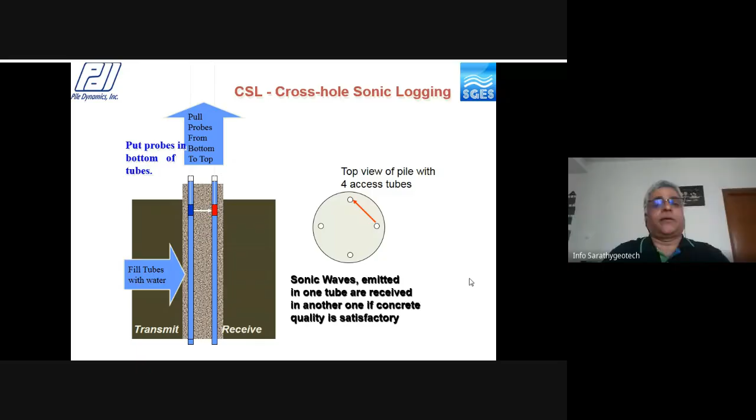So once you have embedded these access tubes and poured the concrete after certain curing periods, say 3 to 5 days, then you insert these ultrasonic probes, which will transmit sonic waves, emitted from one tube and received from the other tube. The concrete quality is evaluated by taking time measurements between the transmitter and the receivers and pulling these sensors all the way up. At every 50 millimeters of the probe distance, it will record the data. You need to know the length of these access tubes for which you are testing various combinations.

If you have 4 number of tubes, if you want to test all the paths, it will be 6 trials. The measurements required to define the geometry is about 5 trials. As an example, if you have 6 number of tubes with a large diameter pile, all the paths will have about 15 trials, but you could have about 9 paths to define the geometry. This is one between these tubes, this will be the other one, 3, 4, 5, 6, 7, 8, 9, and those dotted red lines can cover the remaining ones. So as a thumb rule, n minus 2 times 2 plus 1 will give the minimum measurements required to define the geometry.

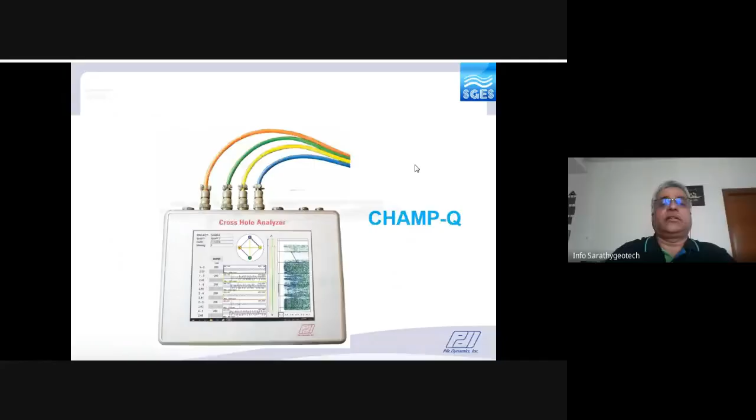Now this could be connected to this tablet called the cross-hole analyzer. These 4 wires will go into those 4 probes. These are trans-receivers, it can now transmit as well as it can record. So 4 probes at a time you can place it, one transmits and that also receives from the other signatures, and you can pull it simultaneously. You can see the probes have been installed and you are pulling this up.

So we also commissioned this as a part of our accreditation program for the cross-hole test. There are 2 piles you could see here: one is with defect, the other is without defect, to evaluate at what level the defect is there. This is very nicely indicated by this cross-hole sonic logging test, and thus we got this accreditation process.

So one transmits the signals and the other receives the signals after a transit time. This time is very important. You know the wave speed of the concrete, you know the anomaly in the concrete - there is a different time. So this data will create a black and white waterfall diagram. This is your first arrival time.

If there is any delay in the first arrival time, that indicates your defect in the pile. You could see here, this is the arrival time. So if there is any delay in the arrival time, that will be an indication of the defect.

You know the spacing, you know the arrival time between the pulses, thus your wave speed can be recorded. If it's a uniform wave speed throughout the length of the concrete, then it's the same. But if you have a varied arrival time, then your wave speed changes, and thus this defect can be clearly identified.

So how do you find defects? You find the defects by these signatures of the first arrival time and also the signal strength. A reduced energy and a delayed arrival time indicates a defect. It's a very simple test, interpreting flaws and defects.

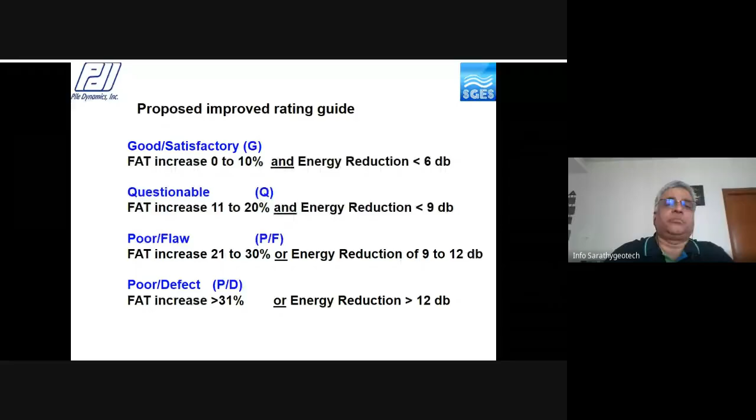It can be good if you have a 10% increase in the arrival time, between 10 to 20% it is questionable, and poor or defect beyond that. This is how we need to categorize based on the data and put it in the reports. And then the client makes a decision to accept this pile or not.

And you could automatically find the defects. You see the first arrival times, and these are the defects. As you could also see, the delay in the arrival time indicates a lower wave speed. Lower wave speed is contamination in the concrete.

So when to test? As I said, it has to be allowed for curing. Generally after day 3, you start testing - day 4, 5, 6. So you have consistency in the data. Maybe 3 days is a good time for you to do the test. That is how you need to calibrate at a particular point of time.

But some guidelines, say French norm, require the test to be carried out after 7 days. If you use a PVC tube, there will be a debonding issue throughout the length of the pile, so you need to test as quick as possible. Between 3 to 5 days is a good time to test using cross-hole sonic logging test.

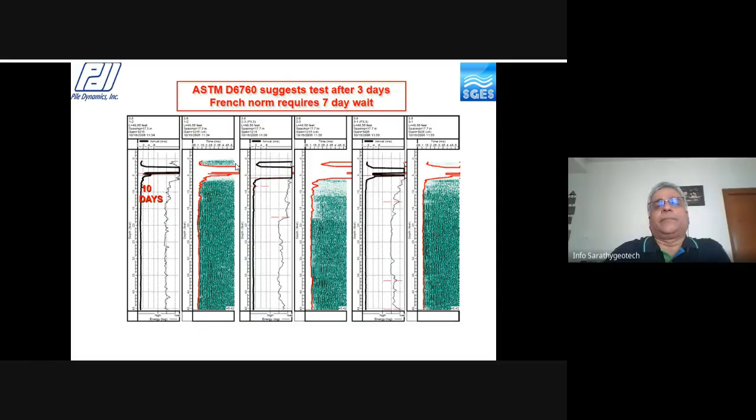Now you could clearly identify that the defect is at the top of the pile. Anybody can identify it if the data is very good. And here the defect could be at the bottom of the pile because you don't see any arrival time at the bottom. This is exactly proven when the piles were exhumed - you see the defect in the bottom of the pile.

And the pile top anomaly throughout the length of the pile beyond this point, around 10 meters - I think the drill shafts are fine. At the top, you see there is contamination. The concrete placed through water in the top 10 feet - sorry, it's not meters, it is feet - because of a tremie problem. Finally, they cored the concrete to see that the bleeding was clearly visible, and thus the shaft was rejected.

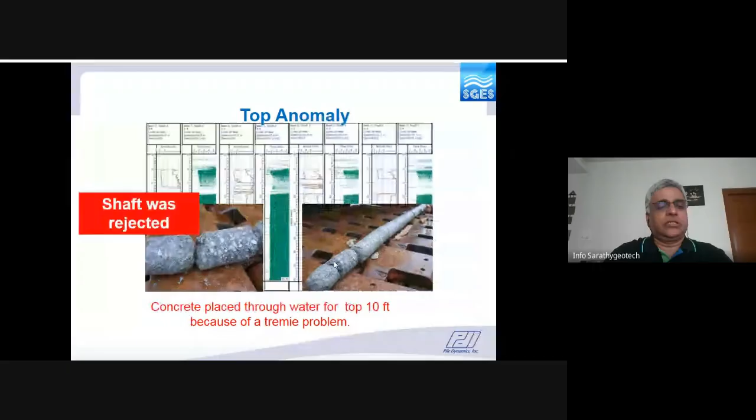So this is about the cross-hole sonic logging test. I'll go to the last aspect on the high strain dynamic test.

So I just recap now. We discussed about the shaft quantitative inspection device, SQUID, which will evaluate the thickness of the contaminations in the pile borehole. We also discussed about the shaft area profile evaluator, which can give an accurate assessment on the geometry of the pile - that is the pile radius, the excavation volume, and the alignment of the pile itself. We also discussed the low strain integrity test, and the cross-hole sonic logging test as a part of the integrity measurements.

Now I'll move to the high strain dynamic test. The theoretical background is the same for a low strain and a high strain - only the pulses will be different. The low strain will have a low pulse, small pulses. In a high strain, you have a massive pulse.

All of us know the static test. We put the kentledge either by putting weight, like sandbags or concrete blocks. Now these days you can also use reaction methods to do a static load test.

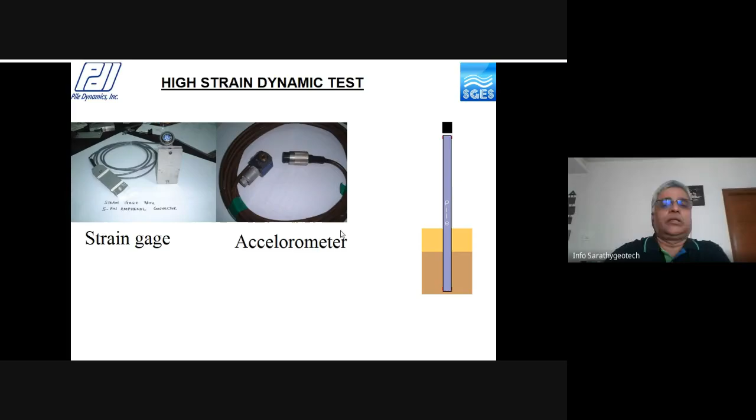But the dynamic test consists of embedding the strain gauge and the accelerometers. I already explained this on the top of the pile. Usually these sensors are mounted around 1.5 to 2 times the diameter below the pile top, and this is connected to the pile driving analyzer.

So under the impact of the hammer at the top of the pile, the stress wave propagates all along the length of the pile, but it encounters the pile base, it has a reflection. And when it comes back to the sensor location, that is 2 times the length of the pile divided by the wave speed, will be the time at which you can see the pile toe response. I already explained this.

Now it's very important to calibrate these equipments. The hardware itself has to be calibrated, and also the sensors, the strain gauge and accelerometer, have to be calibrated once in 2 years. That is a requirement as per the ASTM standards. I think it is good to keep that so that you are ensuring the quality of the data is very good.

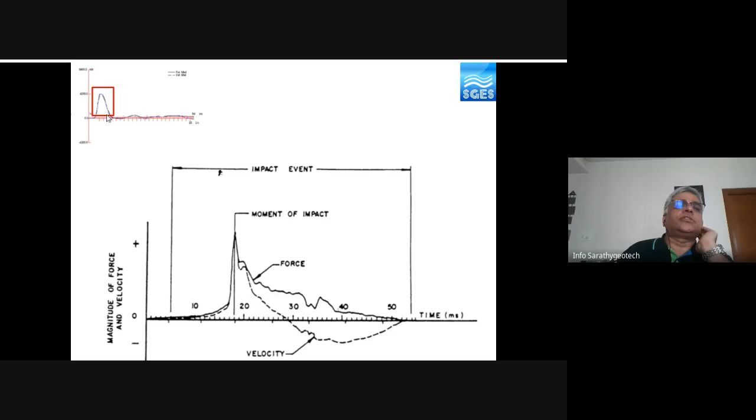The velocity and the force are getting separated before the 2L by C time is reached. This separation of waves indicates there is a resistance being activated, that is your skin friction along the length of the pile. If there is no resistance, then the force and velocity are on top of each other because they are proportional.

Okay, so here you see classical data. This is a force time history. Force is by strain gauge, velocity multiplied by impedance because they are proportional. Therefore force and velocity, both of them are in force units versus time. So this is the top of the pile, 2L by C time. Thereafter, you see the response from the pile bottom.

So wherever there is a separation of waves, you can estimate that this is because of the soil resistance. Here also this is because of the soil resistance. The soil resistance starts from this point in time, all along the length of the pile. So this is a very straightforward interpretation of the data.

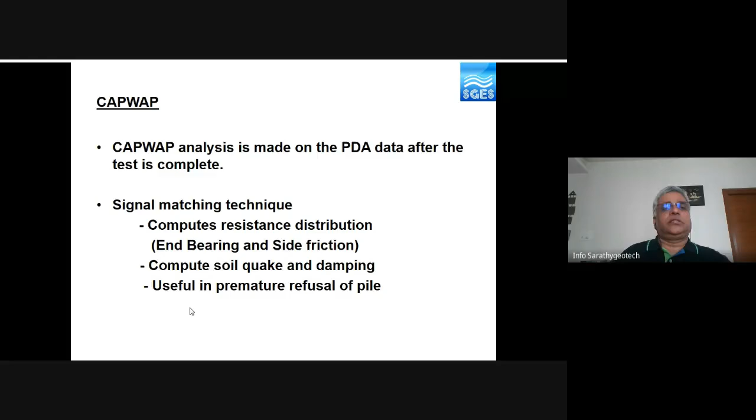So now we know the measured downward traveling wave. The downward traveling wave is an input from the hammer, and the upward traveling wave is the response from the pile. So you bring the signatures to CAPWAP, you apply this downward traveling wave because this is measured, force and velocity are measured, then calculate the complementary or computed upward traveling wave, as you can see in the red color. So this computed one can be compared with the measured upward traveling wave from the pile driving analyzer.

What we do not know here is the system in between. So arbitrarily you can assign some values for the resistance between the base and the shaft. Now when you compute this, compare it with the measured signatures. If they are on top of each other, then your analysis is complete.

That means you have determined your system in the first place. But most of the cases, almost 99.9% of the time, it's not possible, because you have to iteratively do that. If the computed and measured signatures don't match, you have to go back and change your system. So you do trials until the computed and measured signatures match. So it is how it is.

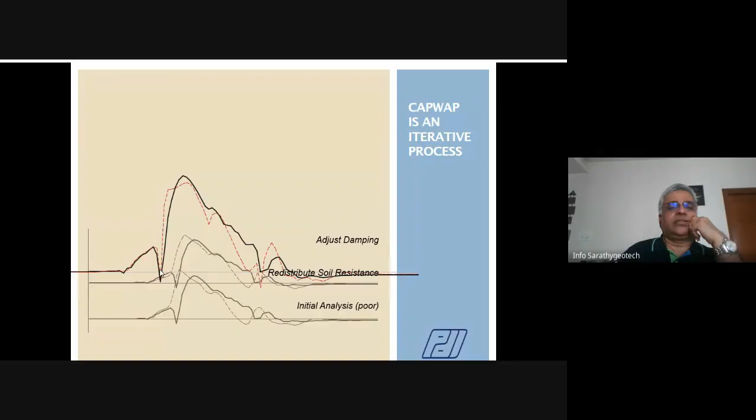The black one is the measured signature and the red one is the computed signature. It is not matching, right? So you go and change your resistance distributions. It is coming closer. The next trial, you adjust your damping values. It is still coming closer, getting nearer to the measured values.

Adjust your soil quakes - it's almost there. Maybe you have to do some small adjustments, increase the total capacity, and finally the unloading parameters. Now you see the computed and measured signatures are on top of each other here, compared to the first trial. This completes your CAPWAP analysis - the trial and error analysis.

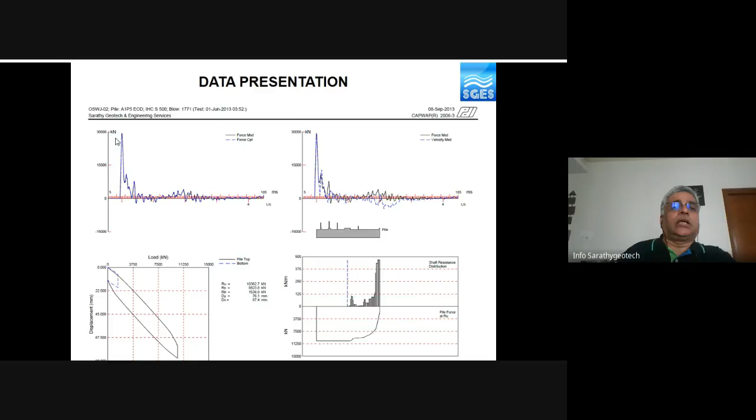The analysis is complete and very good - both the computed and measured signatures are on top of each other. This gives you the total resistance, the skin friction component, and the end bearing component. This is about CAPWAP.

So let us see some case studies, and then I will conclude in another 5 minutes' time.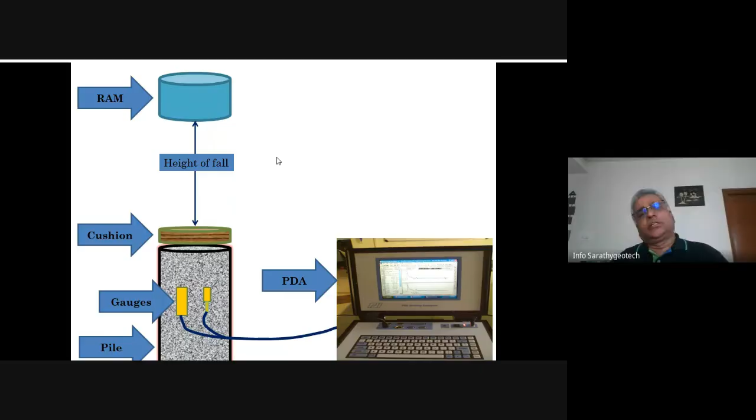To do a test, you mount this sensor. Again, the pile top has to be prepared - I'll come to that. On top of the pile, below around 1.1 to 2 times the diameter, you mount the strain gauges and accelerometers, at least a pair of them on opposite sides, with a cushion and an impact. For testing bored piles, you can use around 1 to 2% of the ultimate capacity to be proved - 1% for a rock socketed pile and 2% for a friction pile.

The information required is the pile geometry, the grade of concrete, volume of concrete, steel reinforcement, and the geotechnical or soil boring information. The steel reinforcement is necessary because you can compute the allowable stresses, and during the test you can ensure the stresses don't exceed the allowable stress. What is the load to be proved is also very important information.

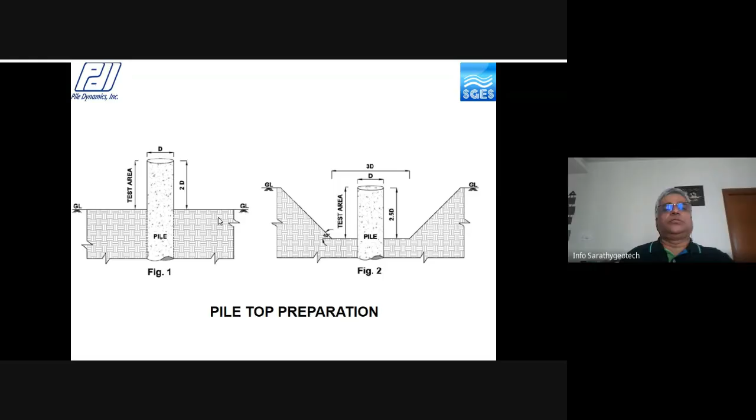Accordingly, you can mobilize what dead weight is required, so as I said, 1 to 2% of the ultimate capacity to be proved. It is also very important that the pile length available for the test area is sufficient. You can grow the test sections above the ground, or excavate around the pile and prepare these test sections. Usually around 2 to 2.5 times the diameter of the pile should be available for you to instrument and test these piles.

When growing the pile and preparing the test sections, it should be free from all contaminated, loose concrete. It should be sound concrete and reinforced even at the top, and you prepare the pile top with concrete, leveling it nicely so you see a good pile top preparation.

Sometimes if people do not understand the proper practice, you could also see pile tops weirdly being prepared. If you mount these sensitive sensors on these unprepared pile tops, 200% you will not get the data, and it also damages the sensors. So this is also not acceptable. You have to prepare this with concrete, not mortar.

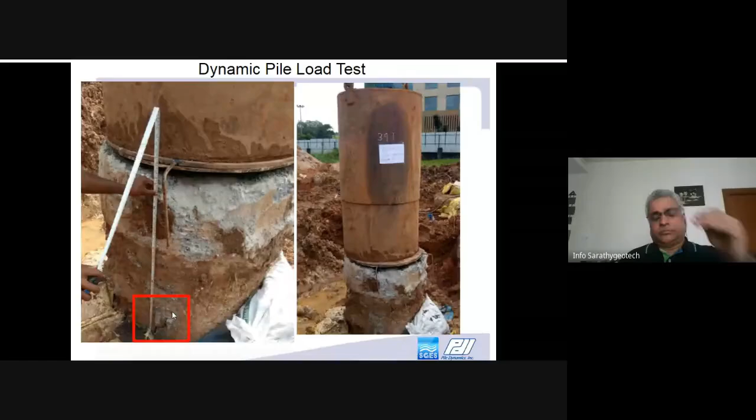So how about this? The pile surface has not been grinded nicely or leveled, and again the very sensitive instruments are mounted. You see this is an unguided drop. The pile tops are not prepared properly, and if you mount your sensors on an unprepared pile top, it will not give you any data.

If you don't reinforce it, then with even a small impact the pile top will break, and that deters your progress. Now you cannot do any further tests. You have to redo the pile top preparations and come back to site. So do it right the first time. Then you mount your sensors.

It's good practice to use around 4 strain gauges, 90 degrees apart, particularly while testing bored piles, because bored piles are more susceptible to bending. What happens if you mount only 2 sensors? If one is not giving you data, you have to clip the opposite pair too. But if you mount 4 sensors, you can take the average of all 4. If one is not giving good data, you can clip off that pair and use the other. At least you still have data. So it's good practice to use 4 strain gauges, as you can see here, particularly for testing bored piles.

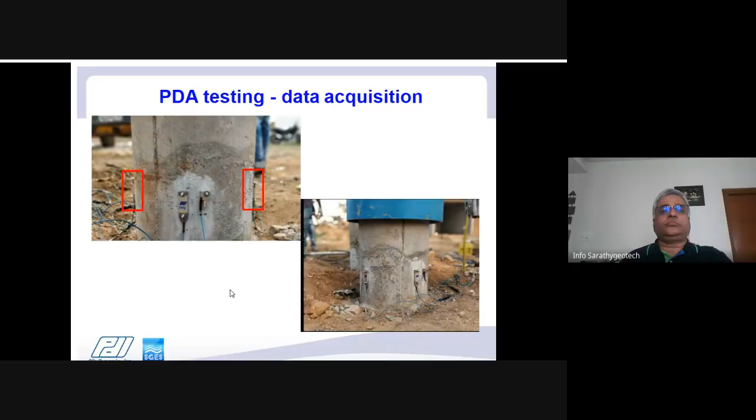Yeah, the 4th one is on the other side. So prepare the pile top, mount the sensors, 4 strain gauges, and 2 accelerometers is good enough. Then you put your wooden cushion striker plate with a guide, and give an impact. When you give an impact, this pile driving analyzer captures your force and velocity time history.

The dropping system can also vary across the world. This one is very unguided, so probably we want to avoid this kind of dropping system. You may have to use a guided drop to reduce bending. Even if you use guides, it has to be safe. As you can see here, the dead weights are toppling, so safety issues have to be taken care of on site.

In order to mitigate this, we actually tried to have a donut system of dropping with a model, and fabricated the prototype with a 3-ton dead weight. I think I'll play the video now.

The sensors are mounted below the pile top, and now it is connected to the pile driving analyzer. So you're cutting off those links, which will give an impact to the top of the pile. Yes, so this gives an impact, and you acquire the force time histories.

There are many guided impact driving systems you can use depending on the site conditions, all over the world. As the loads increase, you may have to design those guides so that you get a good impact without causing any bending, while also keeping it safe. This is a 40-ton system used in the Philippines, and even in India now, in Bangalore, where we are testing the metro piles. We have this guide system, which also uses around 40 tons dead weight.

So what you see on the screen after the test is complete is a force, velocity, time history. This is your 2L/c time. You see the proportionality at the first peak is unity here, that indicates you have good data. At every blow you get your energy transfer to the pile, which is your EMX. The stresses, CSX is your average of those strain stresses, CSI is the maximum of the individual stresses. So you can get your tensile stresses, compressive stresses, the proportionality, energy transfer for every blow that you test.

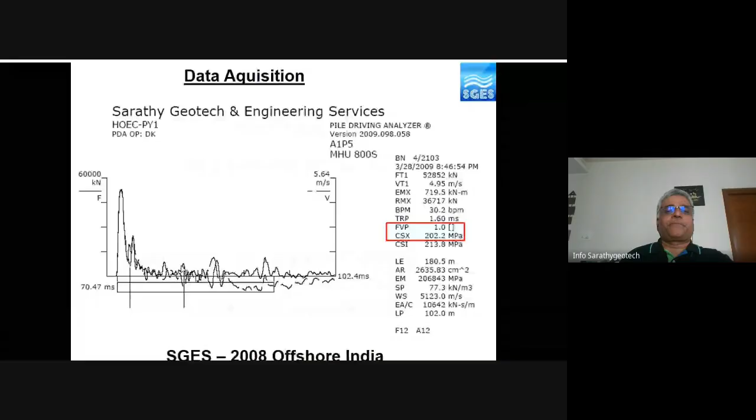So what do you construct from this data? This is your 2L/c time. Before the bottom of the pile, the response starts activating here. The velocity is going up. If this happens at the toe, it indicates your free end, but it's happening just ahead of the toe. Crisscross of force and velocity is indicating damage, or a reduction in the impedance.

That is how you see in the upward traveling wave also. This dotted line is an upward traveling wave. You are getting a tensile reflection, that is a decreasing in your magnitudes, creating tensile reflections before your 2L/c time. So that indicates a change in the impedance or a damage to the pile.

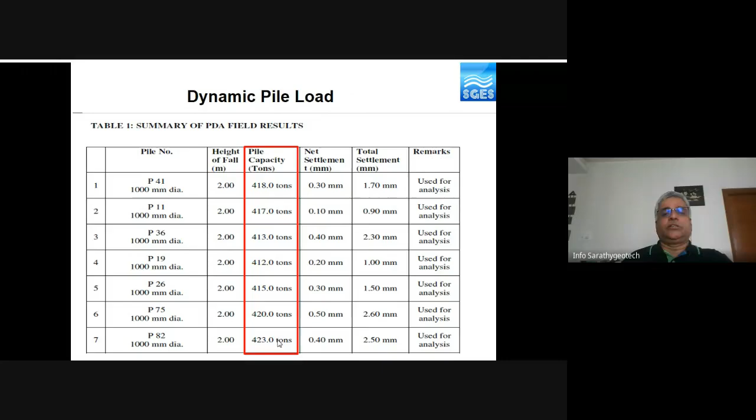Now we saw this data without preparing the pile top properly - an unprepared pile top with unguided drop weight. So what you see here, all the capacity from the 6-7 tests in one of the projects has been reported to have achieved between 412 to 423 metric tons. What they required was around 415 metric tons. But when you do an inspection of the data, this is the raw data.

And you see that after a certain time, the force-velocity proportionality is there at the first peak, then there is a separation of the wave. It indicates the resistance distribution along the length of the shaft. In the upward traveling wave also there is an increase, indicating a linearly increasing resistance along the length of the shaft.

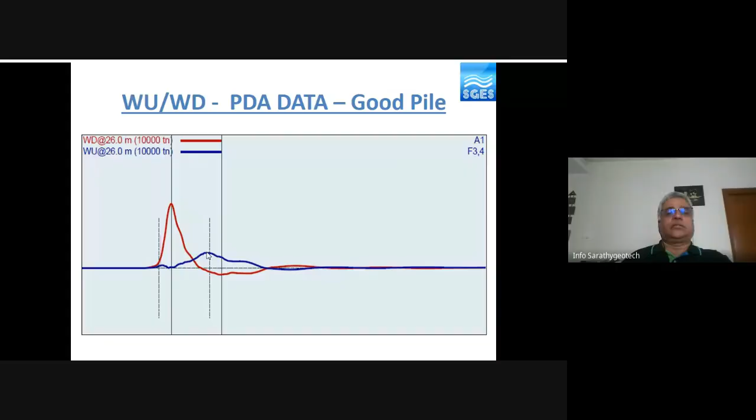This also can be visualized in the CAPWAP analysis, which also gives you a linearly increasing resistance along the length of the shaft.

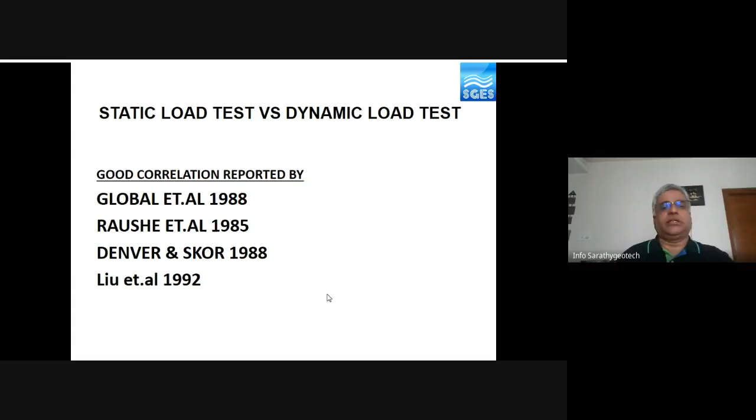The results of the dynamic pile load test must be evaluated by a qualified and experienced geotechnical engineer. There are many publications showing good correlations between static and dynamic load tests, and this has been reported by several researchers. As you can see, the database has increased a lot. Between the dynamic and static load test, we can say the Davisson criteria, with its offset limit, correlates very well with the static load displacement curve.

As far as codal practice, the low strain integrity test is codified in IS code 14893. But the high strain dynamic test is still not codified in the Bureau of Indian Standards. A committee, CED 43, was formed, which released the working draft for high strain dynamic testing of reinforced concrete bored piles in 2016. We are already about 5 years from that working draft, and the Bureau of Indian Standards has still not blessed us with the code. I'm sure they are working on it to release it soon.

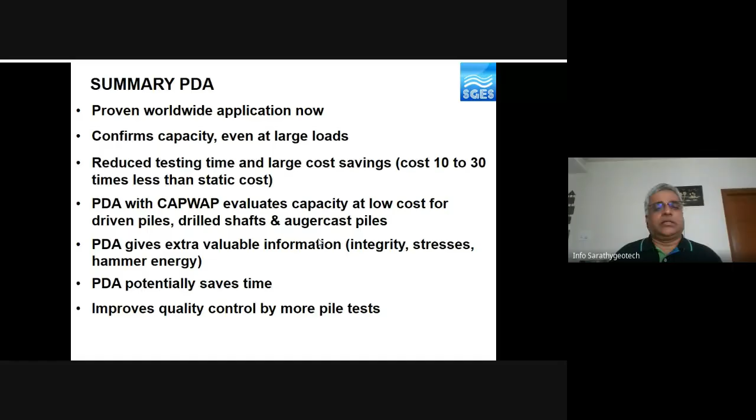To sum up, the pile driving analyzer has proven worldwide application, confirms capacity at large loads, reduces testing time, and provides large cost savings. PDA with CAPWAP evaluates capacity at low cost for driven piles, drill shafts and auger cast piles. It also gives extra valuable information on integrity, stresses, and hammer energy, potentially saves time, improves quality control by allowing more pile tests on a site, and will replace static tests, particularly for offshore piles where it is impractical to bring in templates to do static load tests.

With this, I will conclude my presentation. I thank the organizer for giving me an opportunity to share some experience. I hope it was useful. I'll now happily take any questions if you have. Thank you very much, ma'am.